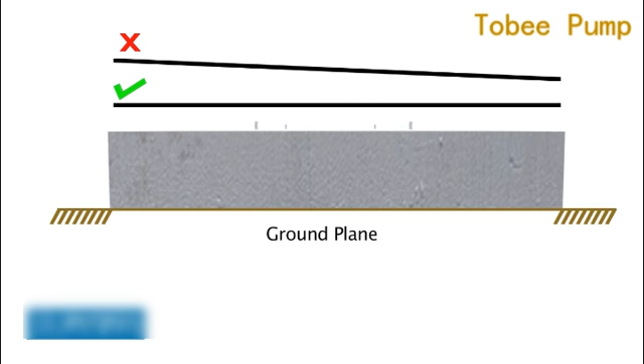Planning the installation. Before installing the pump, ensure that the foundation on which the pump will be placed is prepared well. It has to be sufficiently substantial to take the weight of the pump and absorb any possible vibrations from it. The foundation has to be absolutely straight, without any inclination or tilting on any side. The foundation bolt of proper size should be embedded in the concrete and the base plate tightened, ensuring it is level in all directions.

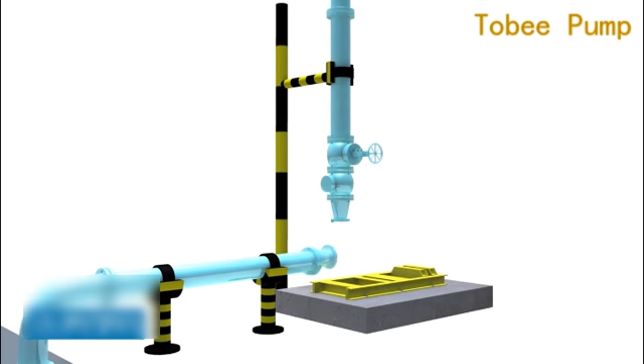Piping associated with the pump must be anchored and supported independently of the pump and should never put any strain on the pump casing. When the pipes are not supported, their weight is borne by the pump casing and may cause it to crack or deflect. It is important that the connections be carefully aligned axially, angularly, and in length.

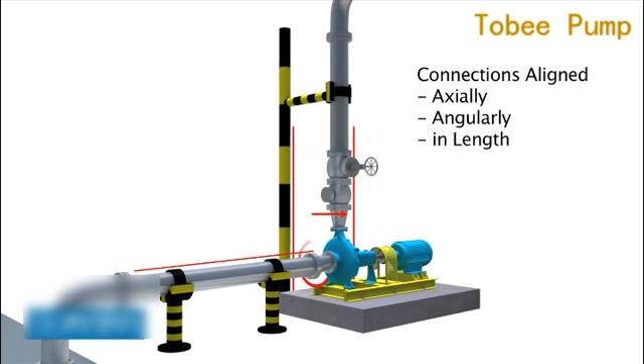Suction piping in case of suction lift condition, negative suction. The piping run and connection fittings should be properly aligned and supported separately. The elbow should be of long radius type. All suction piping must be airtight.

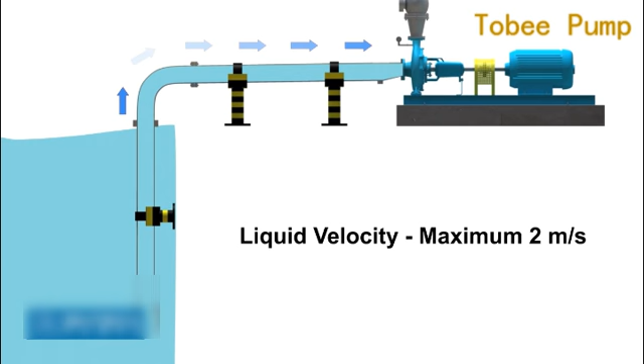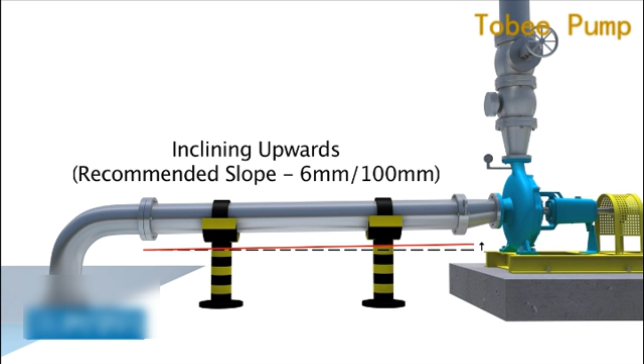The suction pipe should be sized to ensure a liquid velocity of not more than 2 meters per second. The suction pipe size should be at least one commercial size larger than the opening of the pump inlet. All suction pipes should have a continuous rise to the pump suction inlet. A slope of 6 mm per 100 mm is recommended.

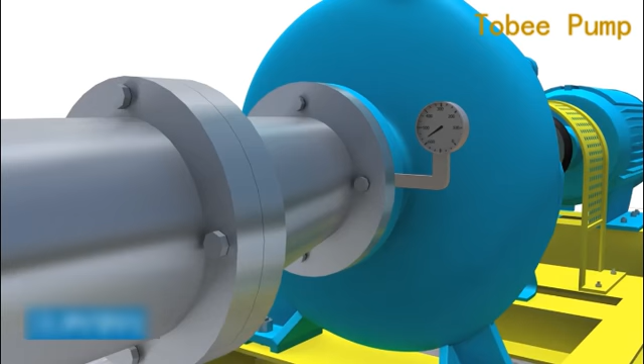No isolation valve is recommended. There should be a tapping provided for installing a vacuum gauge in the suction line.

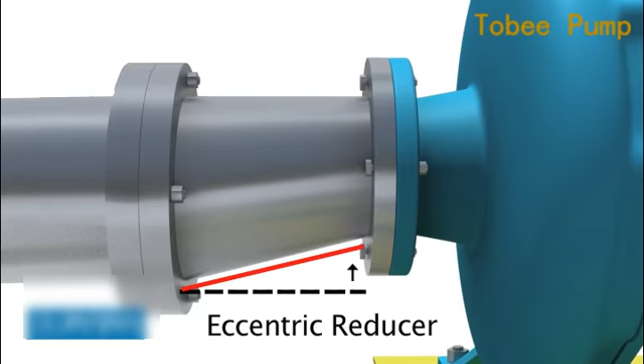The reducer joining the straight length of pipe in the pump line should be an eccentric reducer, with the inclined side of the reducer as the bottom side. The straight length of pipe after the eccentric reducer should be 2 times the pipe diameter.

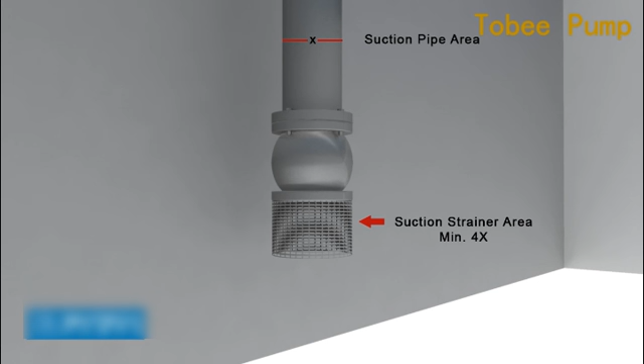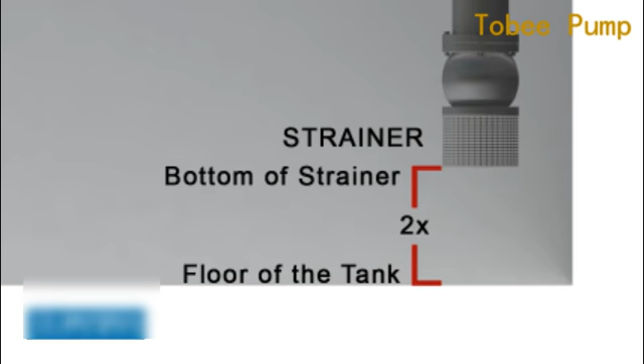The suction strainer must be at least 4 times the suction pipe area, and the mesh size should prevent particles that could clog the impeller from passing through. The minimum depth of submergence of the strainer should be at least 3 times the pipe diameter, measured from the upper row of holes of the strainer. The distance between the bottom of the strainer and the floor of the tank should be considered as 2 times the pipe diameter.

Suction piping in case of flooded suction condition, positive suction. In case water is being supplied to the suction through gravity, for example an overhead tank, a slightly different setup is needed. The elbow should be of standard type or long radius type.

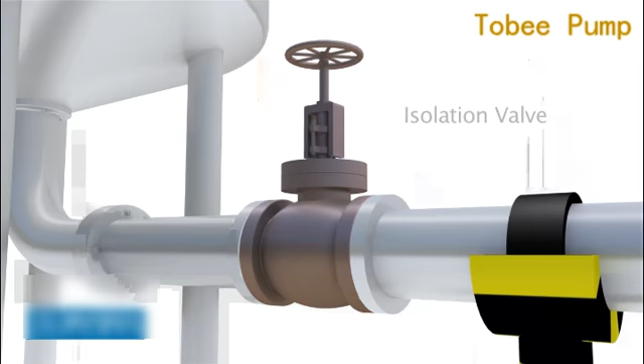An isolation valve should be provided in the suction line. The pipe supplying from the tank into the pump should have a descending inclination. The straight run of piping leading to the pump suction nozzle should be at least 3 to 6 times the diameter of the pipe from the upstream elbow.

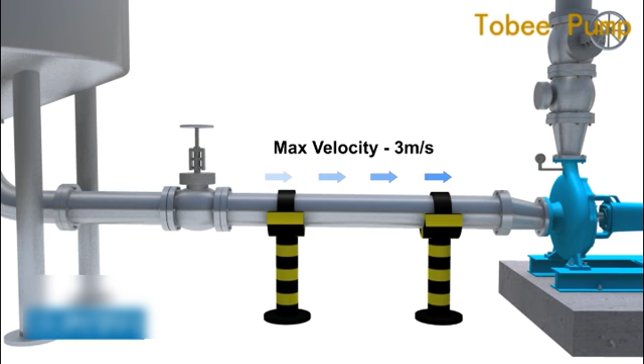The suction pipe should be sized to ensure a liquid velocity of not more than 3 meters per second. There should be a tapping provided for installing a pressure gauge in the suction line. The reducer joining the straight length of pipe in the pump line should be an eccentric reducer, with the flat side of the reducer as the top side.

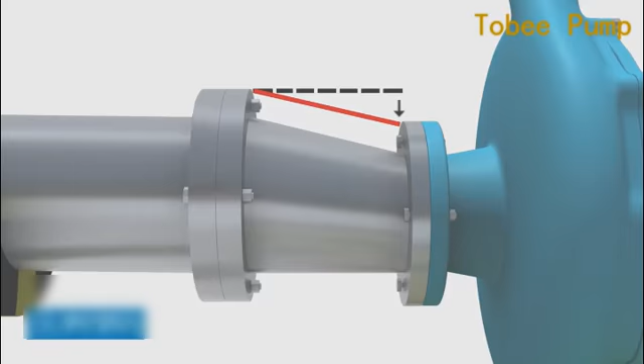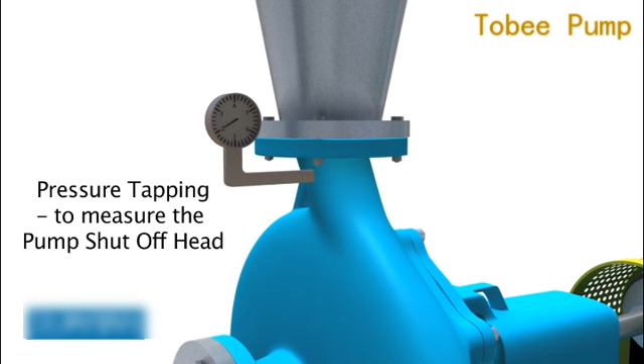Description of the discharge pipe. There should be a pressure tapping as close to the pump outlet and before the isolation valve as possible, to measure the pump shut-off head.

Concentric reducers are installed in the discharge pipe to minimize friction losses. The check valve used in the discharge should be of non-slam type to prevent hydraulic shocks. The isolation valve is provided downstream of the check valve so that it can be taken up for servicing whenever required.

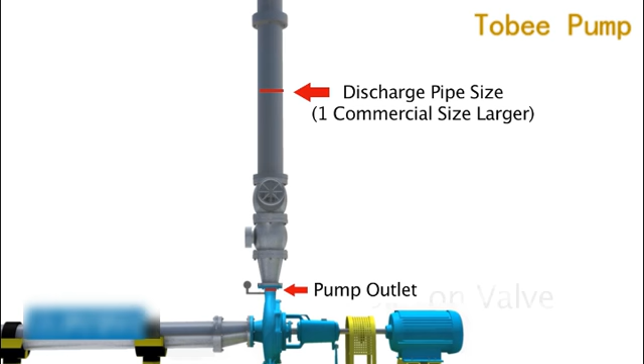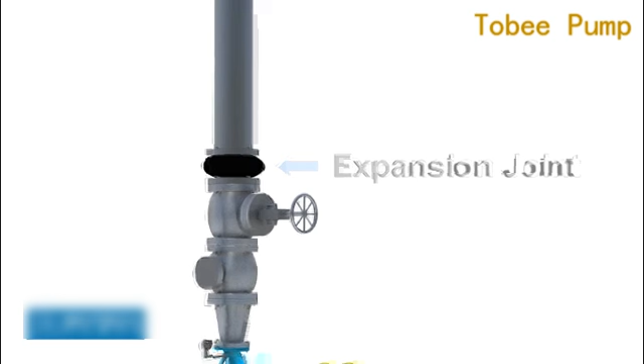Discharge pipe size should be at least one commercial size larger than the opening of the pump outlet. The number of fittings and size changes should be minimal to prevent fluid friction losses. Expansion joints may be used only after a careful piping analysis, especially when discharge pressures are on the higher side.

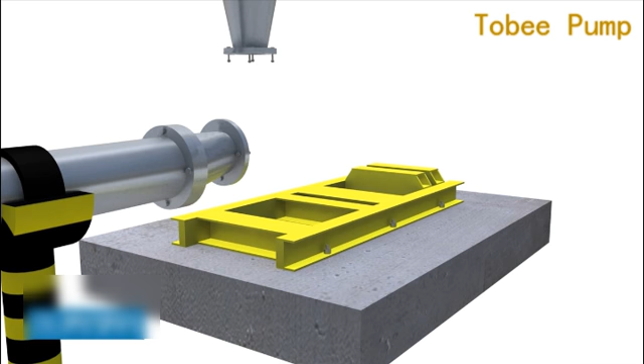Installation of pump and prime mover. The pump and motor unit needs to be fitted firmly onto the base frame using nuts and bolts before fitting any pipes. It is essential to confirm the distance between the shaft ends. In the subsequent step, the pump and motor are aligned to final tolerance using a reverse dial gauge or a laser alignment tool.

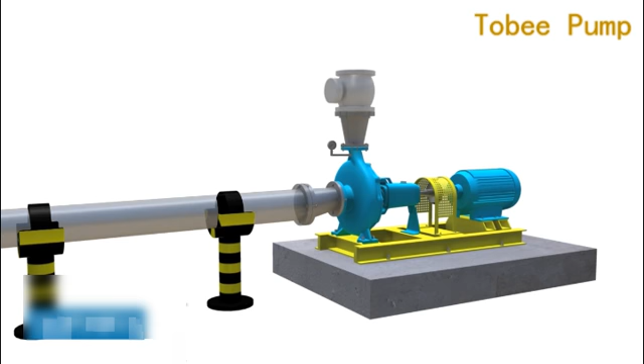After the alignment is completed, the piping associated with the pump should be bolted. Once this is completed, the alignment should be rechecked and similar readings should be obtained. If this is not the case, the piping should be investigated and suitable corrections made. If left unattended, it can cause stress on the pump casing.

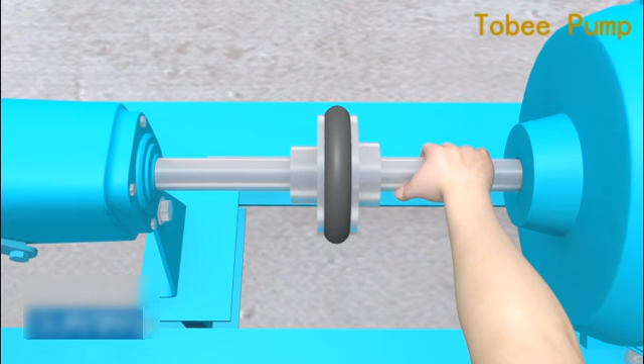The motor should be wired correctly to ensure the correct direction of rotation. This check has to be carried out before the pump is coupled. Once the pump and motor have been coupled, test the movement manually by rotating it by hand to see if it is rotating smoothly.

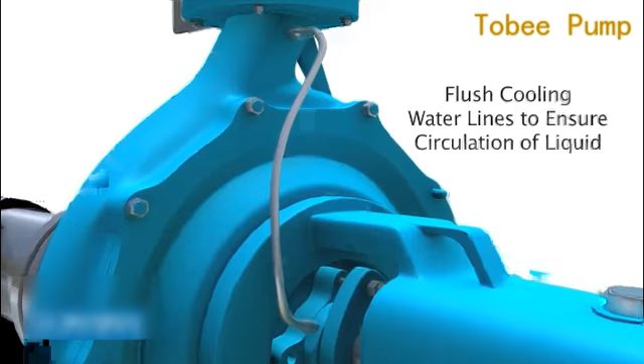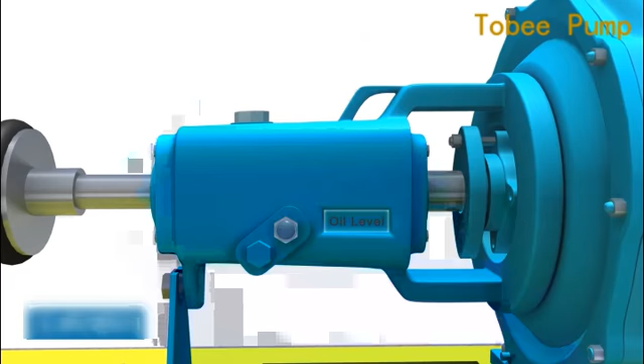Pre-operational checks. All cooling water lines connected to the pump need to be flushed. The cooling water lines are opened and circulation of liquid is ensured. The bearing housing should be drained of its oil and refilled with fresh oil of correct viscosity.

It is necessary to confirm that the supply and return cooling lines are connected to their correct header. Place the coupling guard and tighten the bolts. Ensure that the pump...